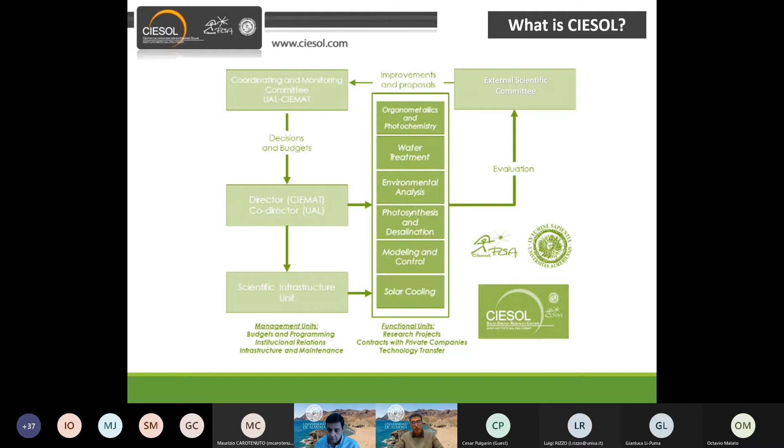Here we have the structure of CIESOL. The center includes 6 fundamental units. Many undergraduate and master students develop their curricular practice in the center since its foundation, largely from the University of Almería, but in some cases from other Spanish and European universities.

There are also many PhD students who have done stays in the center, making collaboration in the frame of the SFERA project, which is a Horizon project. The aim of this project is to boost scientific collaboration among the leading European research institutions in solar technologies, offering European research and industry access to the best research and test infrastructures and creating a virtual European lab.

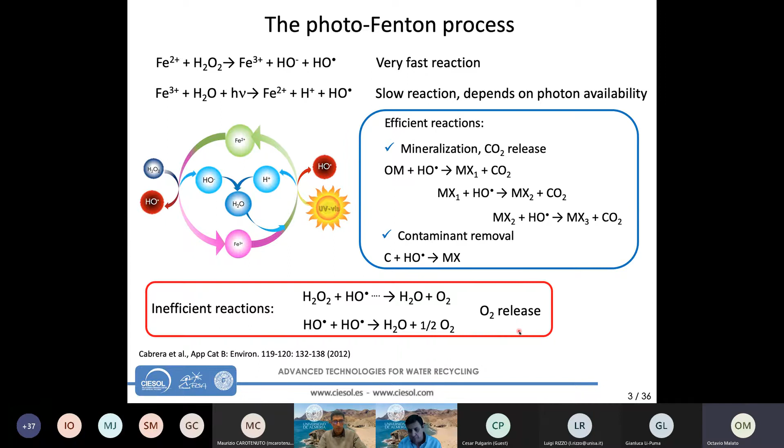The Photo-Fenton process is strongly dependent on pH. Iron 3 is photoactive and soluble at acidic pH, and a value of pH 2.8 has been reported as optimal. But we can operate the Photo-Fenton process at neutral pH too. In this case, we have two main problems: iron precipitation at neutral pH and the presence of bicarbonates, which are a scavenger of hydroxyl radicals. To solve the problem of iron precipitation, we can use iron-chelating complexing agents. Among the different complexing agents, the most popular is EDDS, because it's biodegradable and stable in water solution.

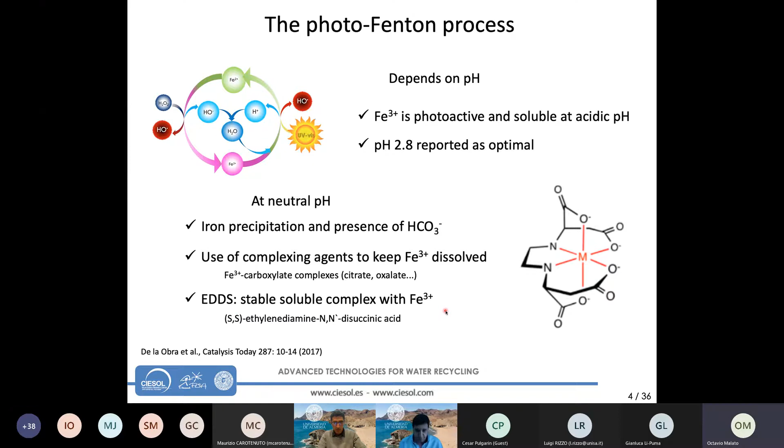When designing a Photo-Fenton reactor, it's very important to consider some factors. First, we will see what are the inputs in the design process. We need to consider the type of wastewater—this has a paramount influence on the process—along with the flow rate. Very close to the type of wastewater, we have the contaminant concentration and the type of contaminants, whether we want to remove chemical contaminants or biological contaminants. And finally, the process target: mineralization, decontamination, disinfection, or all of them at once. So the process target is very, very important.

The next set of conditions we have to take into account is the operating condition for the reactor. That is, what is the radiation availability, the kind of radiation we're going to use, solar or artificial radiation. We need to choose the pH, acidic or neutral, the iron source and its concentration, and finally the hydrogen peroxide concentration we want to use in the treatment.

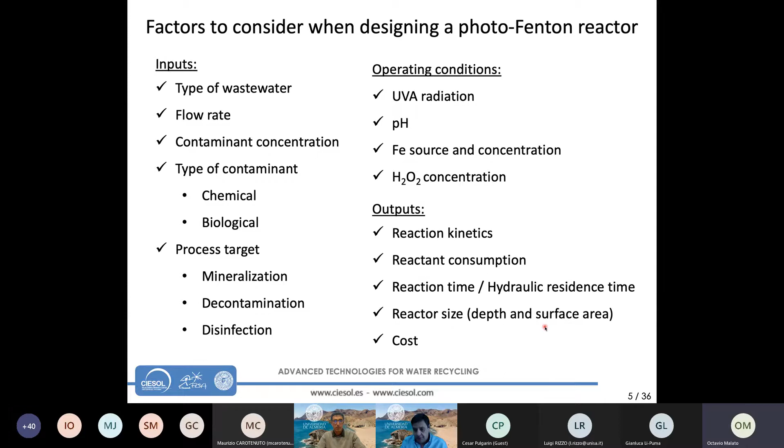As outputs, taking into account all these factors, we will be able to calculate the reaction kinetics. With these kinetics, we can obtain the reactant consumption and reaction time if we work in batch mode, or the hydraulic residence time if we work in continuous flow mode. Reaction kinetics and the operation mode will give us the tools to calculate the reactor size, that is the liquid depth and the surface area, and finally the cost of the treatment.

We should pay attention to the impact of pollutant concentration. As said before, it's closely related to the kind of wastewater to be treated. In the case of highly polluted effluent, that is toxic wastewater, typically industrial wastewater, the contaminant concentration should be in the range from milligrams per liter to grams per liter.

In this case, the target of the treatment is the organic matter mineralization along with the biodegradability enhancement. To this end, we need a great amount of hydroxyl radicals, and to obtain this amount, we need to work with a high concentration of iron, typically 20 milligrams per liter, and a high concentration of hydrogen peroxide, typically 1,000 milligrams per liter.

As we are going to work with a small volume of water, we can work at acidic pH, and the treatment time is generally measured in hours. So it's a long treatment.

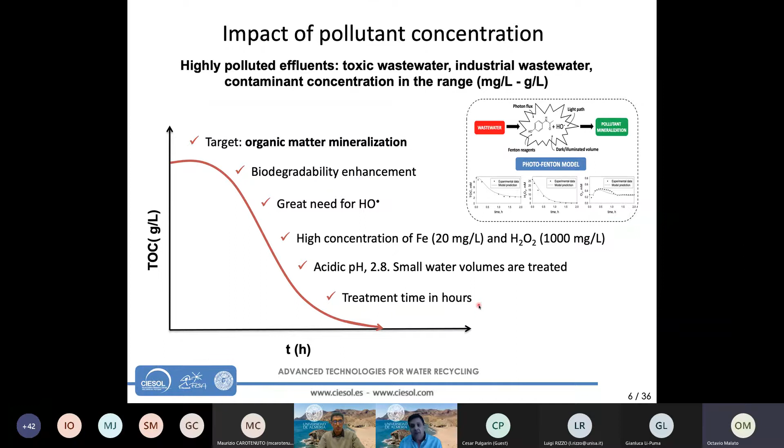A very different scenario is observed when treating effluents containing microcontaminants, as is the case for treated urban wastewater, where the contaminant concentration is in the range of nanogram per liter, microgram per liter. That is 1,000 to 1 million times lower than when treating industrial wastewater.

In this case, the target of the treatment should be the parent compound removal and the toxicity removal, the chronic toxicity removal, because normally this kind of water has no acute toxicity, but it shows certain chronic toxicity. To this aim, we need a low amount of hydroxyl radicals, and therefore we use a low concentration of iron, typically 5 milligrams per liter, and hydrogen peroxide between 30 and 50 milligrams per liter.

As we pursue working with large volumes of water, we try to work at a neutral pH, and in this case the treatment time is in minutes. So the process is much faster than when we treat toxic wastewater.

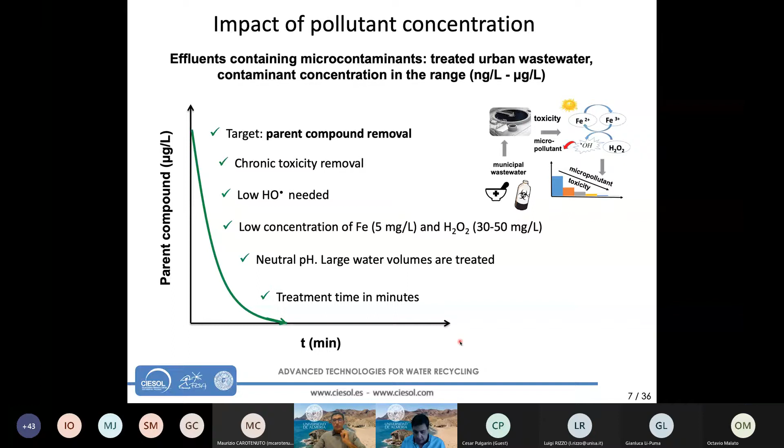The next parameter we need to take into account, among the fundamentals of the Photo-Fenton process, is the radiation.

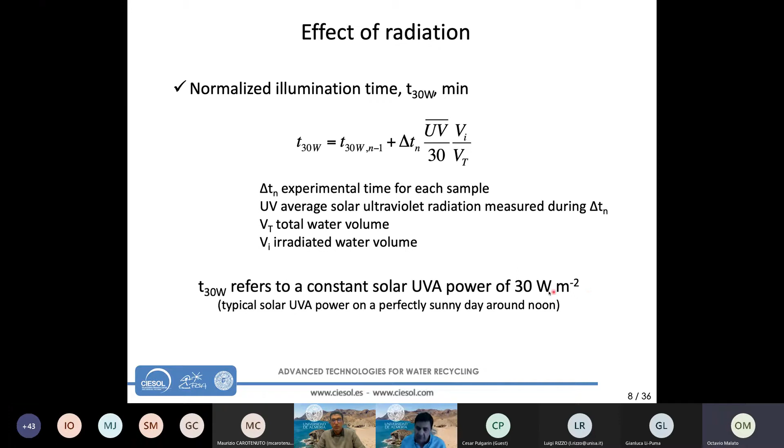To take into account the effect of radiation, we use different variables. One of them is the normalized illumination time, the t30W. It's a normalized time which uses as a reference the UV solar power of 30 watts per square meter, so it's the time of treatment equivalent to an irradiance of 30 watts per square meter.

Another variable is the accumulated solar UV energy received per unit volume of water, noted as QUV in kilojoules per liter, an accumulative amount of energy received in the system. Both QUV and t30W take into account the irradiance reaching the surface, but not the reactor geometry, and they are useful in cases where the reaction rate is limited by light availability.

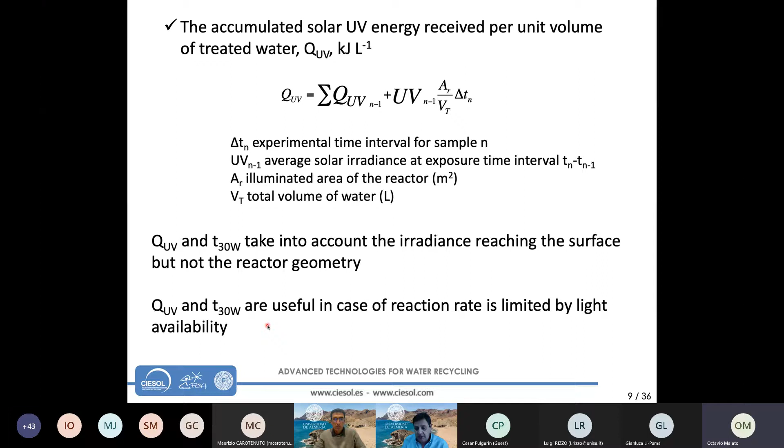Nonetheless, the most useful variable is the volumetric rate of photon absorption, the VRPA, which combines the effect of iron concentration, the irradiance reaching the reactor surface, the optical properties of the absorbing species, and the liquid depth. The calculation is a little more complicated than the QUV or the t30W, but it allows us to take into account the radiation in the kinetics of the process.

We can consider both solar fractions, the direct and diffuse, in order to have a complete picture of the radiation inside the reactor.

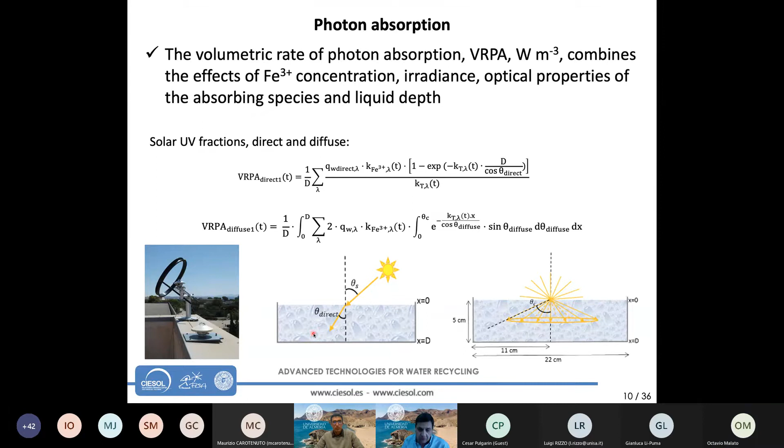To finish this short revision of the fundamentals of the Photo-Fenton process, I would like to speak about the different steps, starting from the water we want to treat and the treatment goal, through to the steps needed before the full-scale design of a solar Photo-Fenton plant.

At lab scale, starting from the wastewater characteristics, we can develop a kinetic model. This model should be validated at pilot plant scale using environmental conditions. Once validated, taking into account the plant location and historical data of temperature and UV radiation, we can proceed with the design of the reactor.

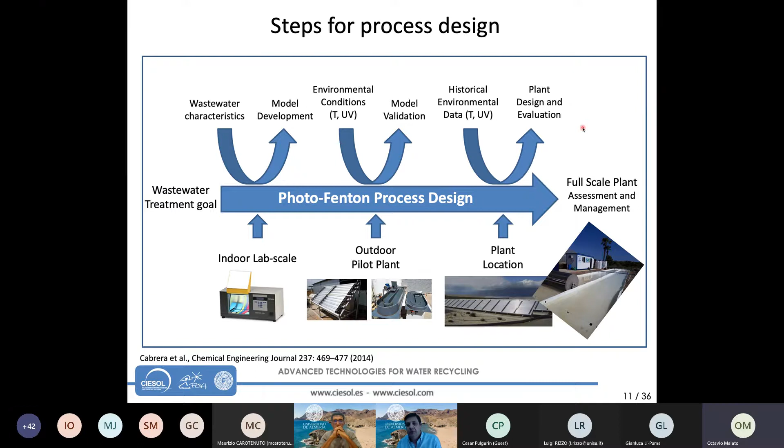Next, I will show you some study cases of the application of the solar Photo-Fenton process.

First, I will show you some research about the treatment of toxic wastewater, in this case, industrial effluents. Remember, the effluent has highly toxic substances. We work at acidic pH, with a high concentration of pollutants, tens or hundreds of milligrams per liter. The treatment targets are organic matter mineralization and biodegradability enhancement by partial oxidation of the pollutants.

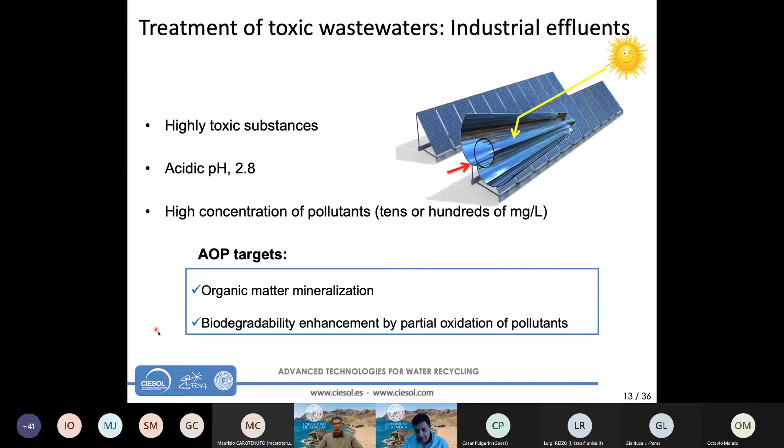We have some research on the treatment of a mixture of 5 pesticides with an initial concentration of 500 milligrams per liter, and the target of the treatment was to reach 40% mineralization. In the figure, we can see how the pesticides are degraded much faster than the removal of dissolved organic matter in the medium, that is the mineralization.

We have a high consumption of hydrogen peroxide. In this case, we work adding different amounts of 200 milligrams per liter of hydrogen peroxide to avoid inefficient reactions. As main features, we consume around 1 gram per liter of hydrogen peroxide to reach this target of 40% mineralization. This mineralization allows the biodegradability of the treated wastewater, and we need long reaction times, around 4 hours of treatment at 30 watts per square meter.

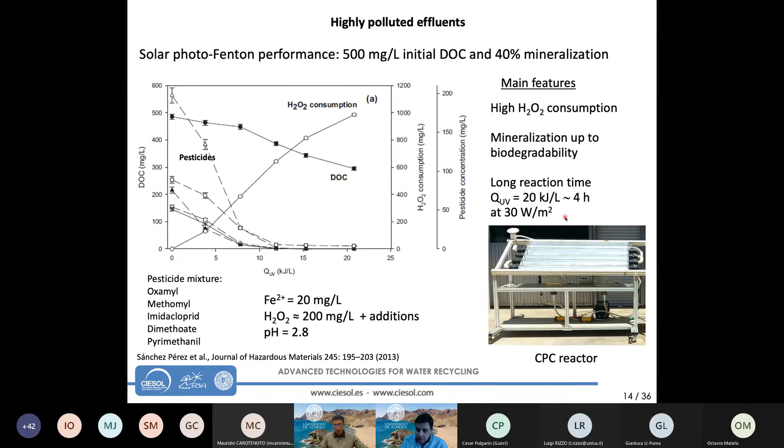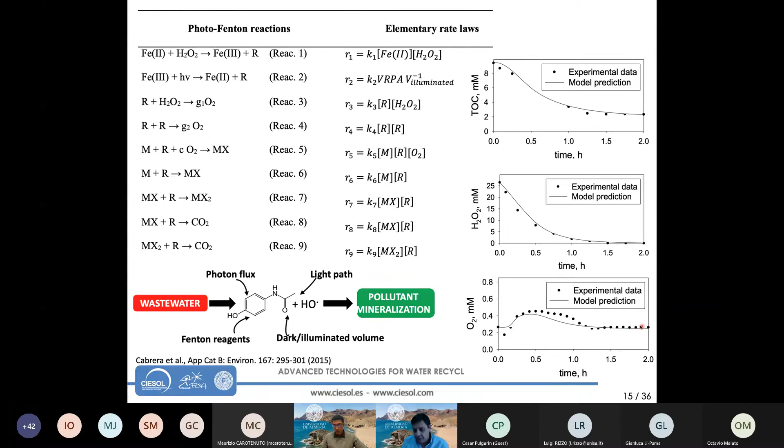We can have a kinetic model of the system taking into account the elementary rate laws of the different reactions taking part in the process, fitting this model to the experimental data. We can use the model to predict the evolution of the dissolved organic carbon, the consumption of hydrogen peroxide, or the release of oxygen due to the inefficient reactions.

The next case is micropollutant removal in treated wastewater. We know that wastewater treatment plants are efficient for chemical and biological oxygen demand abatement, as well as removal of some nutrients, mainly nitrogen and phosphorus. But in the treated water, we can find some microcontaminants, mainly pharmaceuticals and some pesticides, that can be removed by a tertiary treatment, in this case, the Photo-Fenton process.

Here I show some experimental research at neutral pH, to change from the former example which was at acidic pH. First, at lab scale, we worked with the complex iron 3 EDDS as iron source with a low amount of hydrogen peroxide. The synthetic wastewater was spiked with 100 micrograms per liter of acetamiprid, a neonicotinoid pesticide.

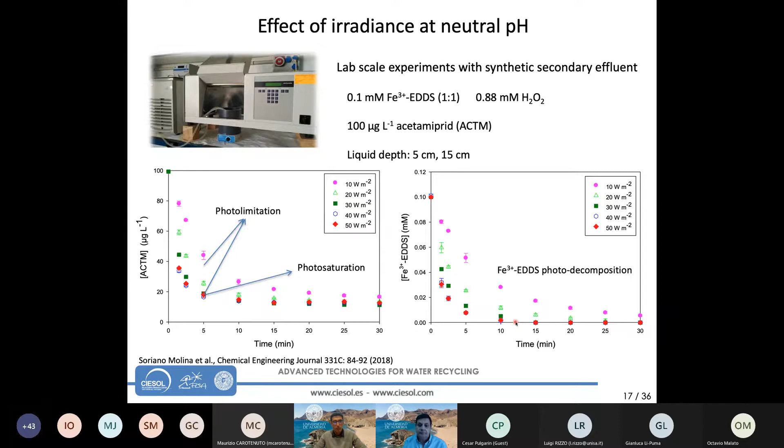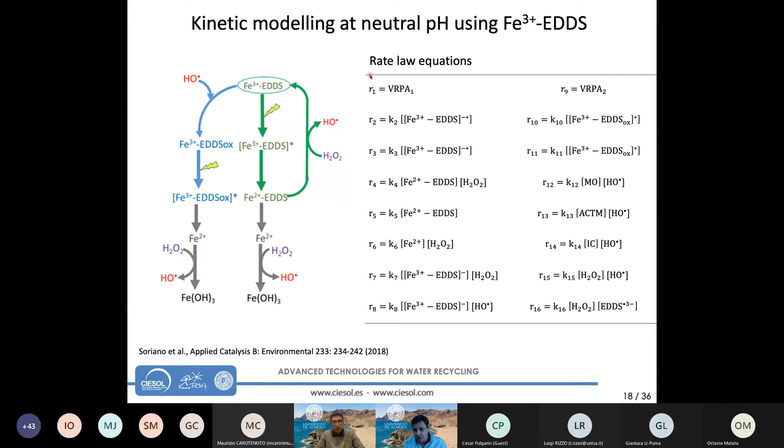The kinetics at neutral pH are commonly more complex than at acidic pH. We have more reactions involved in the process, releasing hydroxyl radicals, and the reaction of hydroxyl radicals with intermediate compounds. But as shown at acidic pH, we can work with the same methodology, starting from the rate law equation, fitting the model to the experimental data to obtain the model parameters.

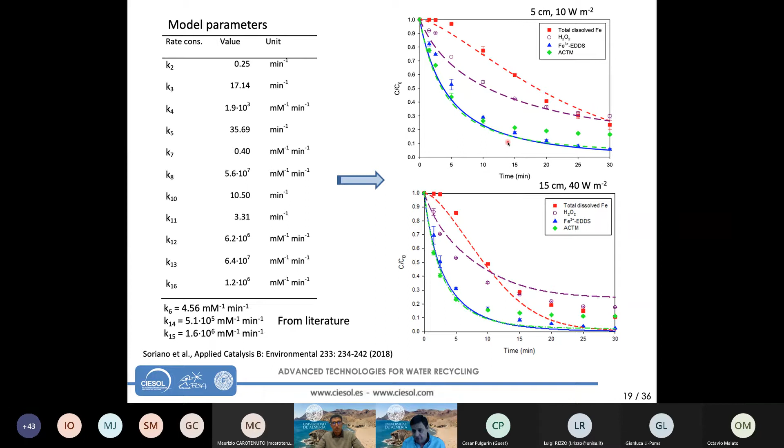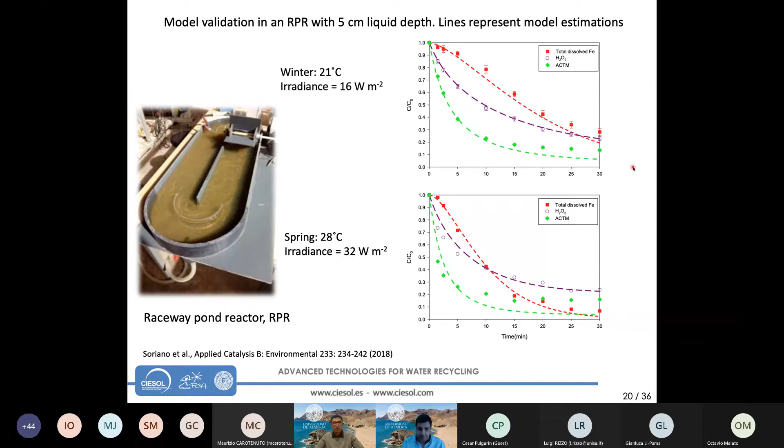With this research, since treatment times for micropollutant removal are very short, a few minutes, continuous flow operation becomes a requirement for large-scale Photo-Fenton process. I would like to show you research carried out at pilot plant scale with actual wastewater, in 2 different operating conditions, acidic pH and neutral pH, with equivalent amount of iron but different sources of iron, and the same amount of hydrogen peroxide.

Here we have a scheme of the reactor and a scheme of the treatment, from the preconditioning of the actual secondary effluent coming from the wastewater treatment plant of the city of Almería. Here we have the solar Photo-Fenton reactor. The water enters continuously to the reactor, as well as the iron solution and the hydrogen peroxide solution, and exits the reactor.

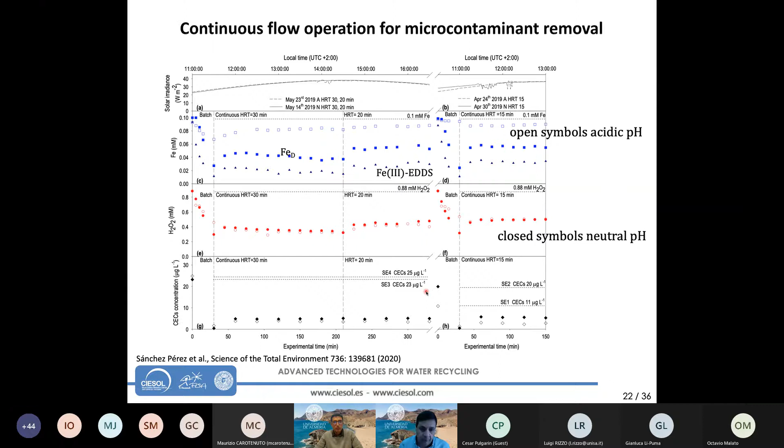As for iron, looking at the profile of iron during the experiments, we observe that at acidic pH, we have a partial loss of iron due to reaction with phosphate, the precipitation of ferric phosphate. At neutral pH, we have precipitation of iron due to the decomposition of the iron-3 EDDS complex.

We observe too that the iron-3 EDDS complex concentration increases as HRT decreases. That is expected, following the kinetic model.

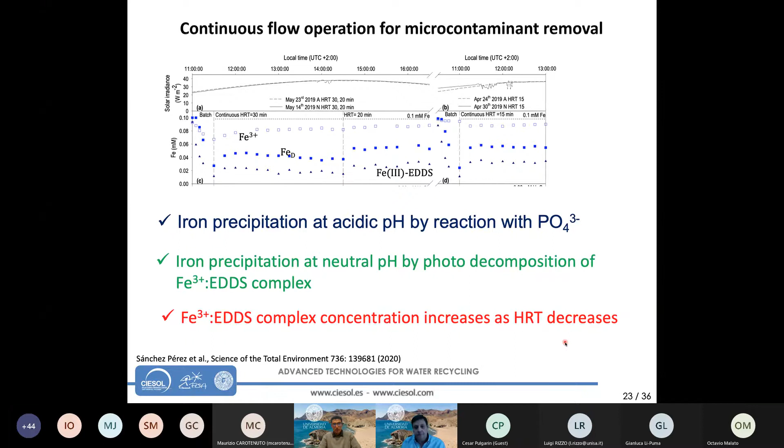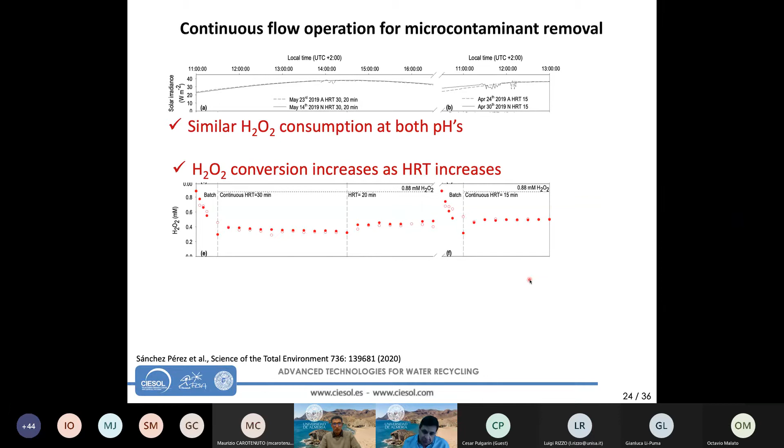As for hydrogen peroxide consumption, we obtain more or less the same consumption at both pHs. And in this case, the H2O2 conversion increases as HRT increases too. This is expected, following the kinetics.

Considering the removal of micropollutants, contaminants of emerging concern, we can see in the figure that at 30 or 20 minutes of HRT, we obtain almost the same removal, a little bit higher at acidic pH than at neutral pH, but in both cases around 80% of micropollutants are removed in continuous flow operation of the pilot plant scale reactor.

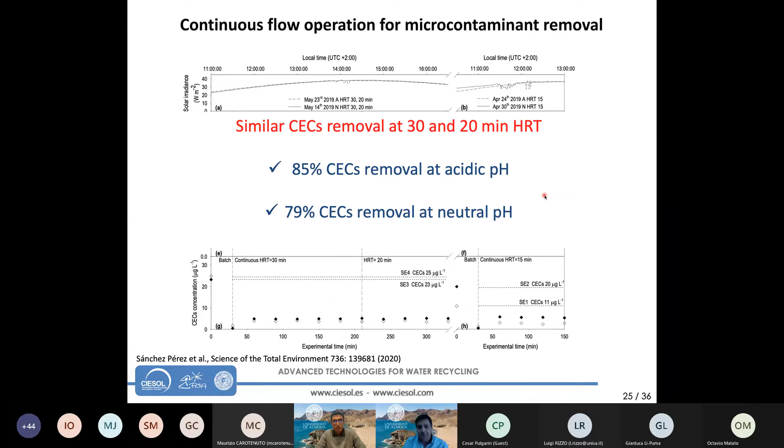With these results, and using the previously developed kinetic models at acidic pH and at neutral pH, we applied these models to the actual wastewater, considering the removal of 3 different contaminants of emerging concern: gabapentin, O-desmethylvenlafaxine, and O-desmethyltramadol. This is an example at neutral pH, and we can see how the model properly predicts the evolution of CEC removal for the 2 HRTs.

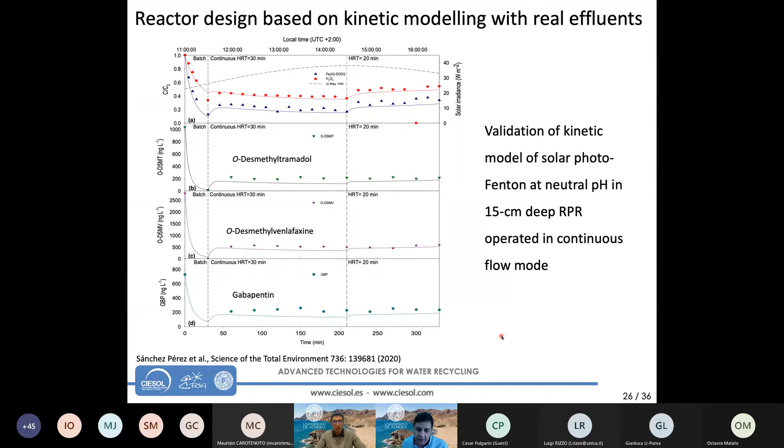That is, 30 minutes and 20 minutes. So with this, we can conclude that we have a kinetic model, at acidic pH or at neutral pH, able to predict the performance of the reactor with real effluents. Taking this model into account, we can calculate the treatment capacity of the system.

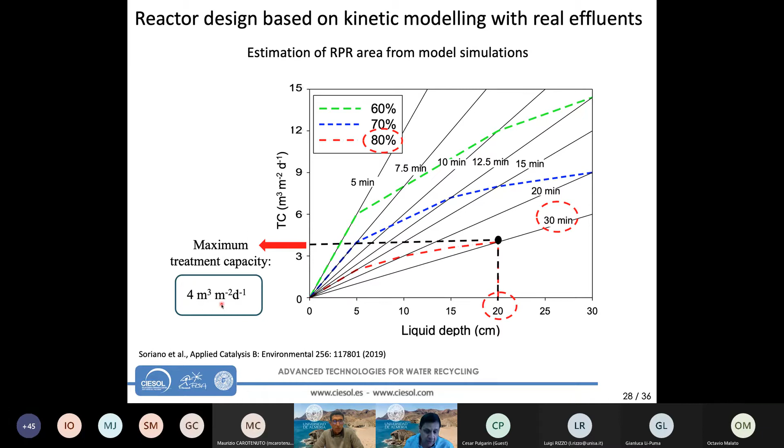In this case, it's 4 cubic meters per square meter of reactor per day. With this data, if we take into account the flow rate of the effluent to treat, for instance 400 cubic meters per day, the ratio between the flow rate and the treatment capacity gives the surface of the reactor, in this case 100 square meters. So the main geometry of the reactor is given with this methodology. We have the surface and the liquid depth.

As for the cost of the treatment, that was the last item we need to calculate when designing a process. Generally, the treatment at acidic pH is cheaper than working at neutral pH. In this case, the cost of neutral pH is higher due to the very high cost of the EDDS, the complexing agent, the iron complexing agent.

But overall, we can conclude that the total cost is mainly affected by the reactant cost, much more than the amortization cost due to the reactor and the cost of construction of the reactor. So the main cost is the reactant cost, and the final cost will depend on the process target. This is very, very important. We have no general cost for advanced oxidation processes. We have specific cost for specific process target.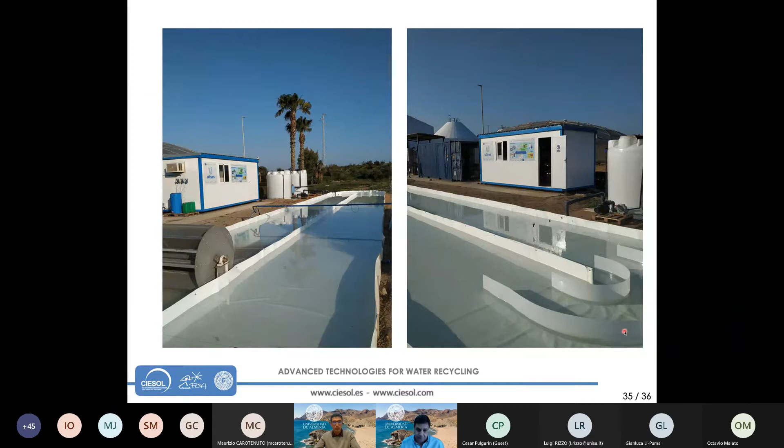Thank you very much for listening, for your attention, and I want to thank all the people of the group, the water treatment group at CIESOL, who have been working very, very hard to reach this demonstration plant.

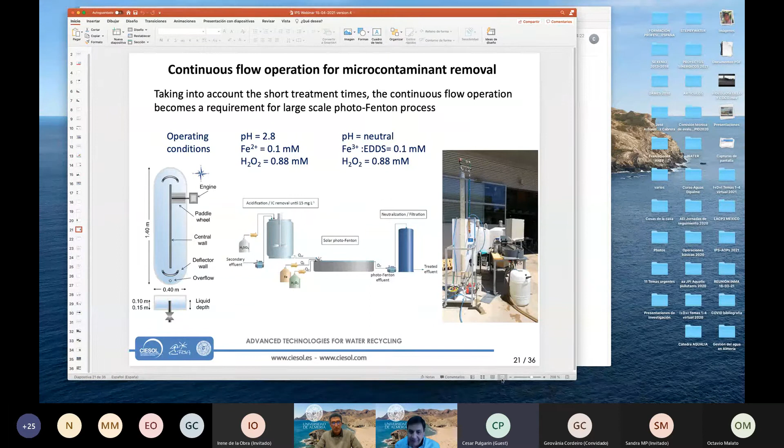Dime entonces, mira, yo veo ahí que tú lo recuperas, tienen que neutralizar este nuevo. Este es el vídeo de la operación con 15 centímetros de profundidad. Tenemos una columna de neutralización, porque era un experimento a pH ácido, en el que en la columna le metemos calcita, carbonato cálcico. Y entonces en la calcita el agua se neutraliza, sale a pH 6 y poco. No está optimizado todavía, pero a pH 6 es prácticamente neutra. Y el hierro se queda retenido en el cuerpo del filtro. Lo mismo queremos hacer para pH neutro, porque el hierro que precipita, conforme se va degradando el complejo, ese hierro lo podemos retener en el filtro.

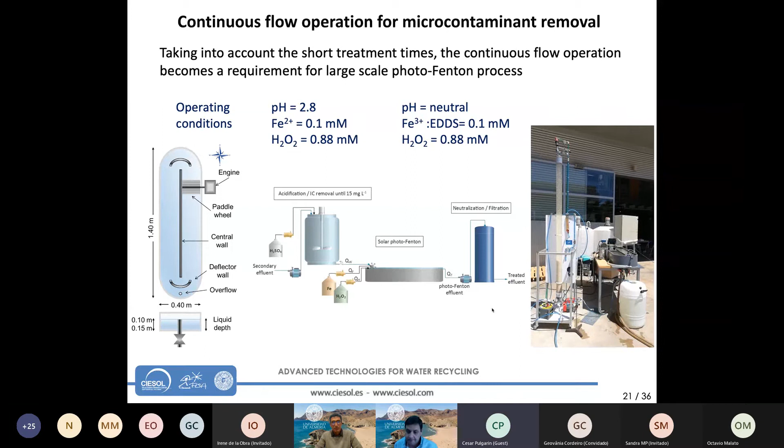Bueno, y me imagino que más tarde van a hacer ensayos de capacidad de esos filtros. A ver si te enseño la planta, es que de planta tenía pocas fotos. Aquí tenemos filtros, ¿los ves? Sí, ya lo veo, el azul. Este es el tanque de alimentación del reactor y este es el tanque de salida del agua. Y este ya es el tanque de filtrado. Es decir, vamos a filtrar siempre el agua, para neutralizar o solo para filtrar.

Y después, me imagino que luego van a estudiar la posibilidad de recuperar ese hierro. No, porque es muy barato. No merece la pena, yo creo que es más caro recuperarlo que desecharlo, y no es problemático ambientalmente, no es un residuo tóxico.

Oye, y la última preguntita, con relación a los estudios de ciclo de vida, hoy en día todos los sistemas tecnológicos en Europa tienen que pasar por eso, es decir, los ciclos de vida, la integración de la energía gris, las contaminaciones grises en el agua oxigenada, ¿eso también lo están trabajando? Sí, está previsto dentro del proyecto Ulises, este proyecto europeo, uno de los grupos es especialista en análisis del ciclo de vida y lo vamos a hacer.

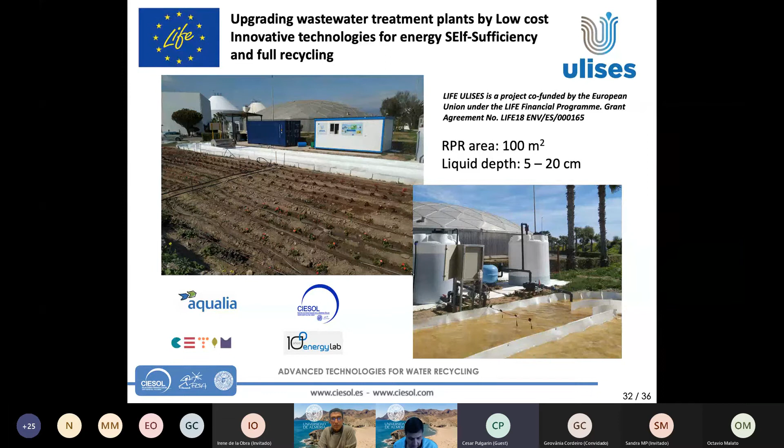Sí, porque son 400. Repíteme entonces: 25 metros cuadrados para tratar 100 metros cúbicos por día. Sí, 100, claro. Por eso era que yo estaba interpelado porque me equivoqué, yo soy disléxico y me equivoco a menudo en todas estas cosas, 100 metros cúbicos por día. Perfecto, uy, esto es casi 10 veces más, esto es mucho más que el CPC. Yo estaba comparando con CPC, pero con TiO2, es casi 10 veces más rápido que los valores que yo tenía, pues con TiO2 ya no trabajo, pero para tener con qué comparar, es casi 8 a 10 veces más rápido, César, las cargas.

Qué bien eso. Sí, César, en el caso de un CPC, el volumen iluminado por metro cuadrado está en torno a los 10-11 litros por metro cuadrado, mientras que en un reactor Raceway, solo con 5 centímetros ya está iluminando 50 litros por metro cuadrado. Y si te vas a 20 centímetros de profundidad, estamos hablando de 200 litros por metro cuadrado, aunque la parte óptica no esté optimizada en un reactor Raceway.